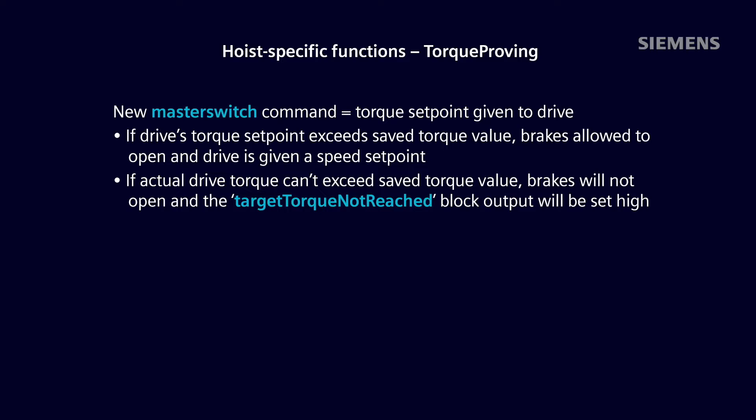If the actual torque generated by the drive is not capable of exceeding the saved torque value, the brakes will not open and the target torque not reached block output will be set high. Taking a look at the TorqueProving block diagram, you can see the main block inputs and outputs. The enable TorqueProving input on the TorqueProving block is directly interconnected to the main drive block. So you will use the main drive block EN TorqueProving input to enable and disable the TorqueProving function.

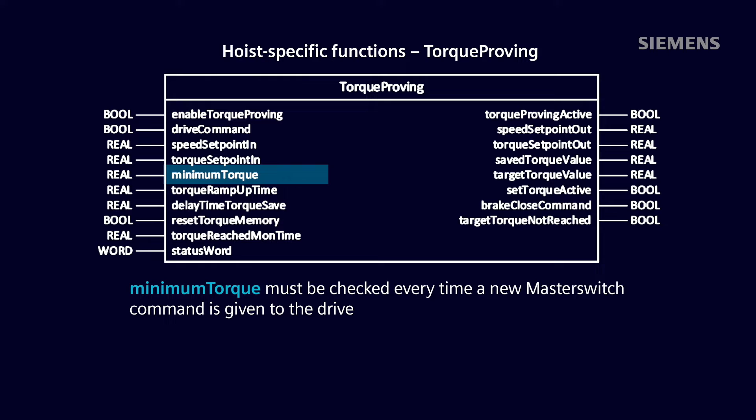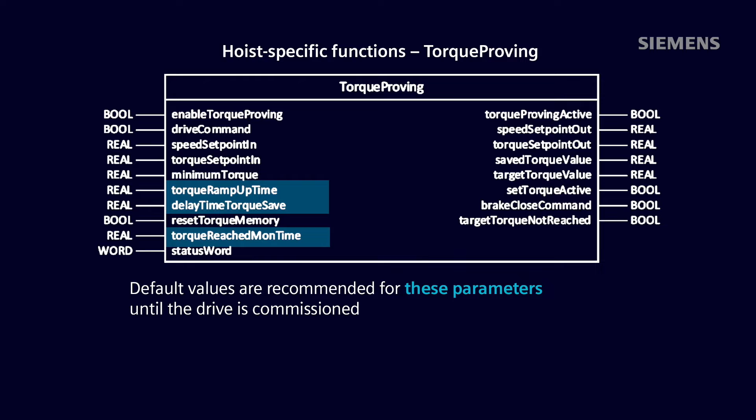You can set a minimum torque value that defines a minimum torque that must be checked every time a new master switch command is given to the drive. You can also set up the torque ramp up time, torque reached mon time, and the delay time torque save inputs. However, default values are recommended for these parameters until the drive is commissioned. Please note that when TorqueProving is used, StartPulse from the LCRBT DCC library can't be used because both blocks are using the same speed controller interface of the drive.

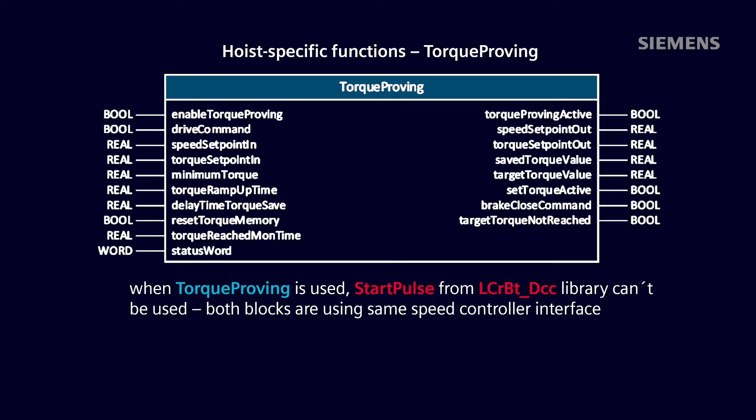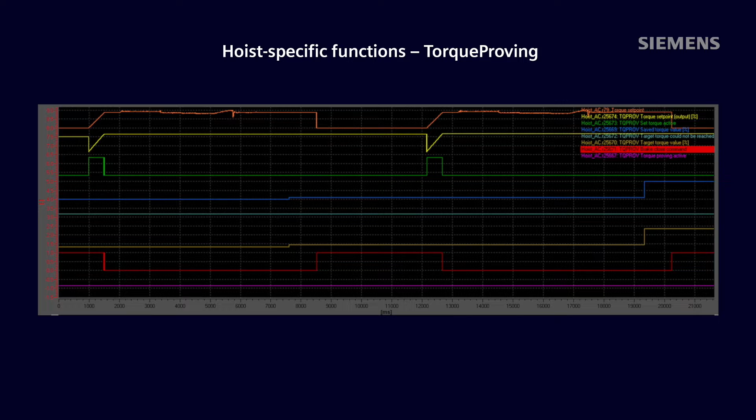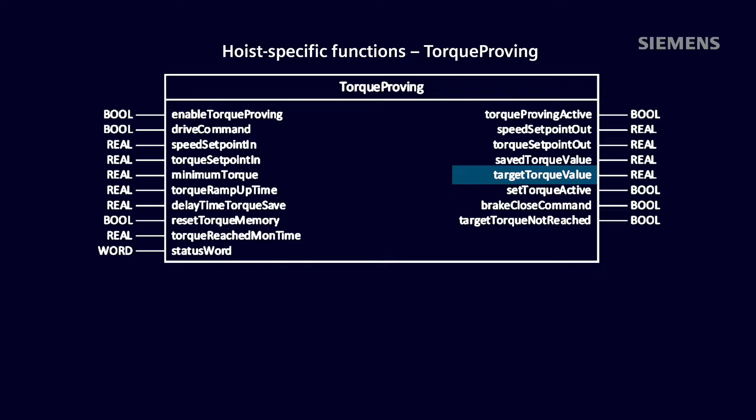This trace displays a successful master switch command where the TorqueProving block has been properly set up. It shows two separate operator commands being given to a drive with TorqueProving activated. In both movement commands, the drive responds to the operator input by ramping the drive torque set point up to the target torque value, which also happens to be the saved torque value for both of the movements.

Once the drive is able to reach the target torque value, the brake close command output is set to 0, allowing the hoist to move only after the target torque value has been proven. Once the operator command is complete, the brake close command is set back to 1, the brake is closed, and the torque set point of the drive returns to 0 until a new operator command is given and this process is repeated.

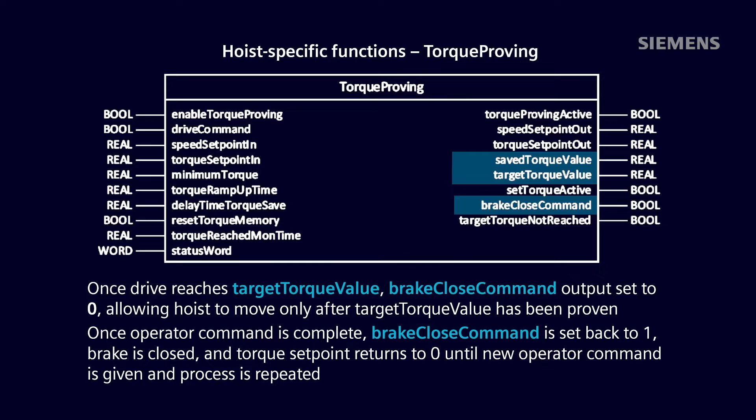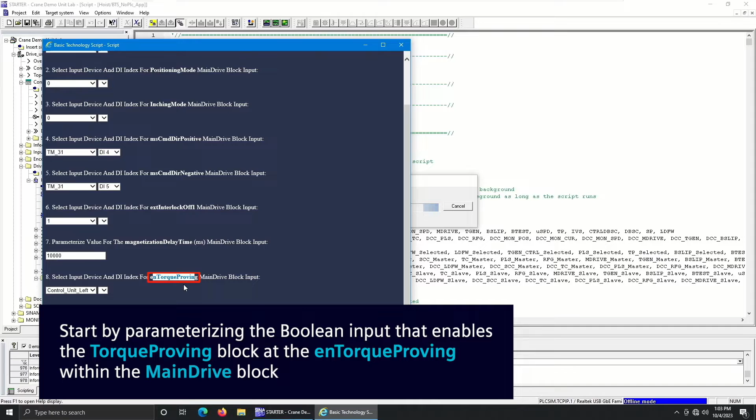During script setup of this block, you will start by parameterizing the Boolean input that enables the TorqueProving block at enTorqueProving within the main drive block. You can use a PZD bit, DI feedback, or simply enable the TorqueProving function by selecting 1 from the drop-down menu.

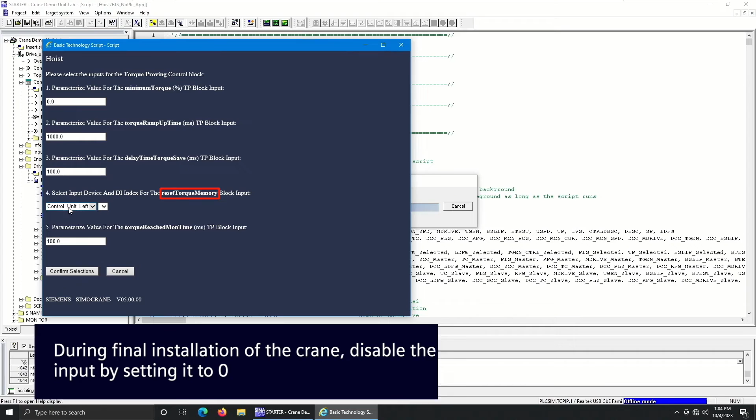On the TorqueProving block setup page within the script, you can parameterize the minimum torque, torque ramp up time, delay time torque save, and torque reached mon time parameters. You'll also be asked to set up a Boolean input for the reset torque memory block input. During final installation of the crane, it is suggested to disable this input by setting it to 0 in the script setup as done here.

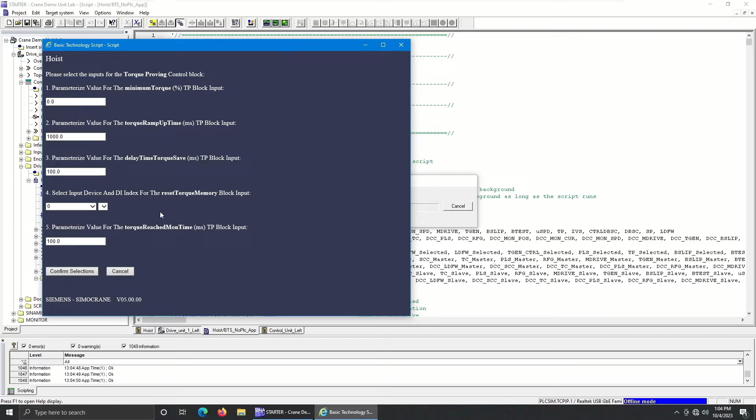However, this bit may be used during initial commissioning if the TorqueProving block fault occurs. This input will reset the last saved torque to be proven value of the TorqueProving block when it is set high.

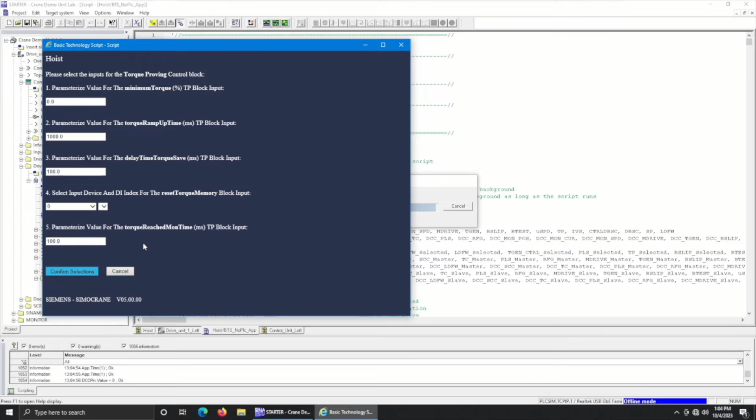As demonstrated in a previous video, you will always be prompted to set up the actual position velocity and ramp function generator blocks. If the actual position velocity block will not be used, you can make these selections for the Enable Act Pos Vel and Start Homing block inputs. The setup for this block, when it is being utilized, will be covered in a future video. So for now, we will keep it disabled by making this selection.

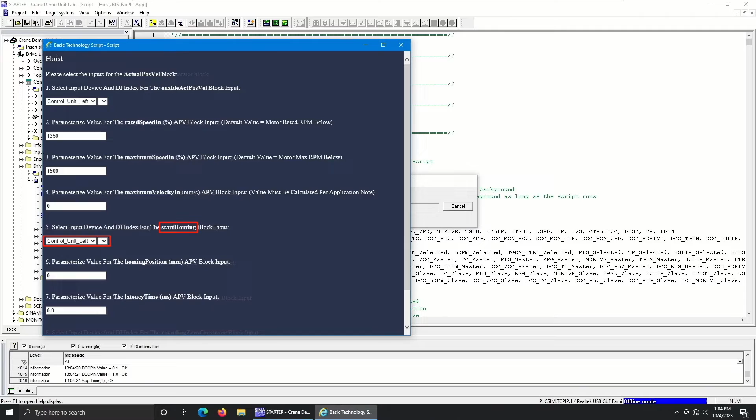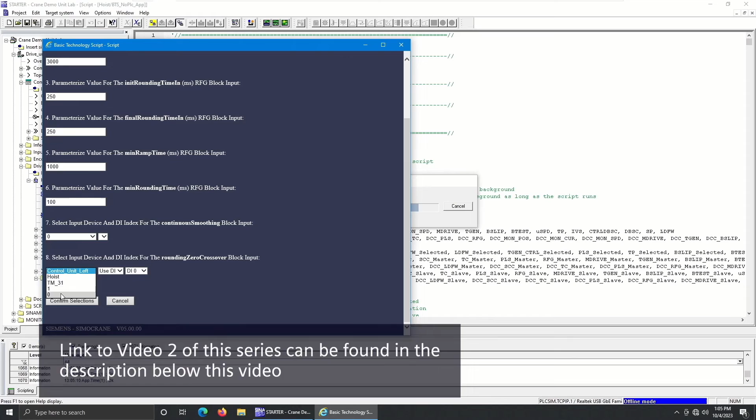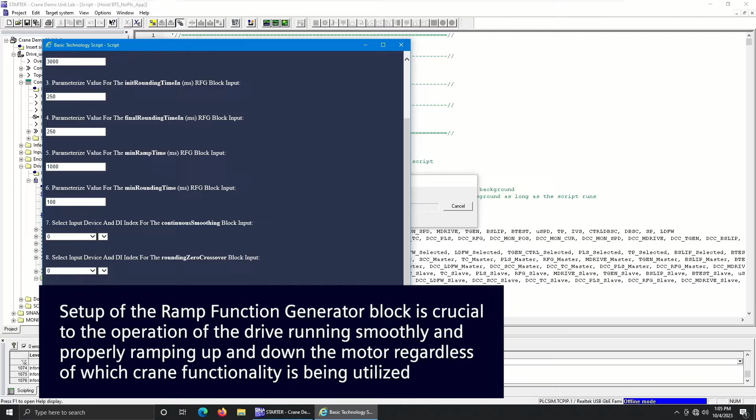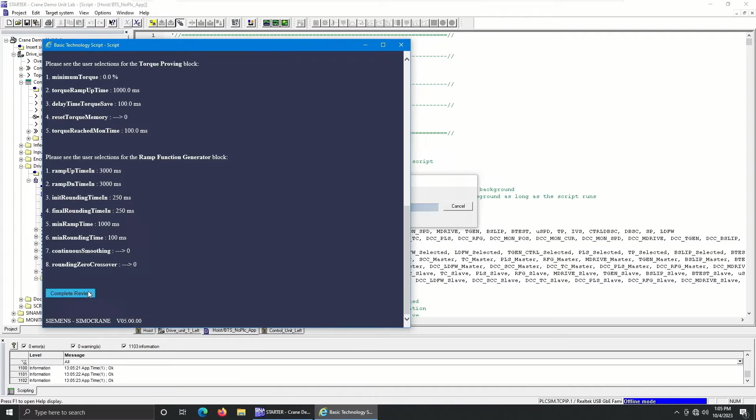Finally, you are prompted to set up the ramp function generator block. Setup of this block is covered in video 2 of this series, so it will not be covered here. However, it is recommended that this block is set up correctly, as it is crucial to the drive running smoothly and properly ramping up and down the motor, regardless of which crane functionality is being utilized. Once the script setup has been successfully completed, you're shown a summary screen of your choices, and the TorqueProving function can now be used while controlling the drive.

Like the TorqueProving block, the StartPulse block works to prevent load sag on a hoist. However, its mode of operation is different. When a drive is switched off, the brake applies the necessary holding torque for a load. When the drive is switched on and the brake is opened, the drive must apply the necessary holding torque. Since the necessary holding torque is not known to the drive when it is switched on for the first time, the load cannot be held and sags as a result.

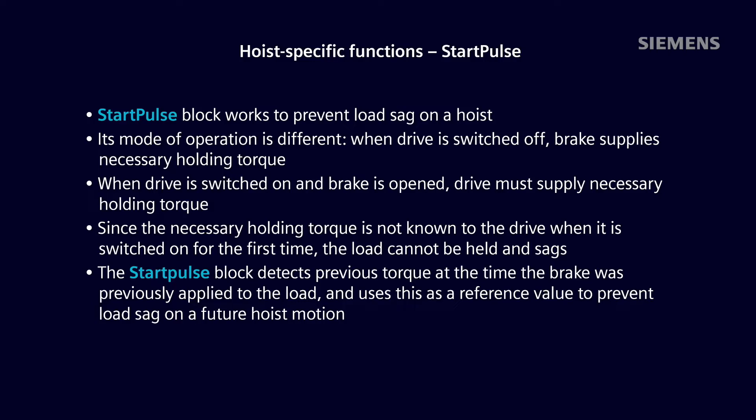The StartPulse block detects the previous torque at the time the brake was previously applied to the load and uses this as a reference value to prevent load sag on a future hoist motion. To use the StartPulse block on a hoist in lieu of the TorqueProving block, the DCC must be opened by double-clicking on the DCC in the project tree.

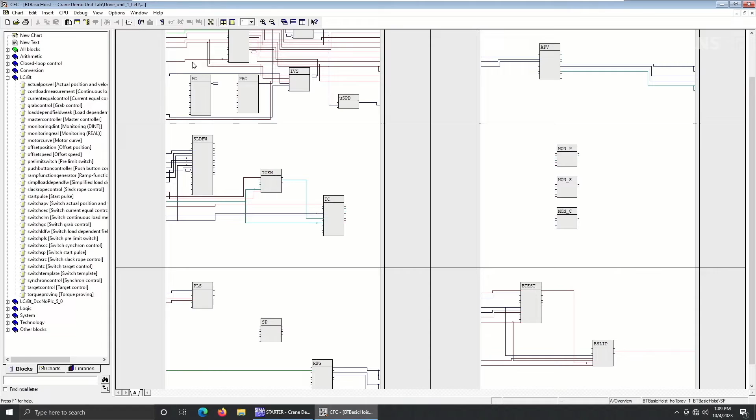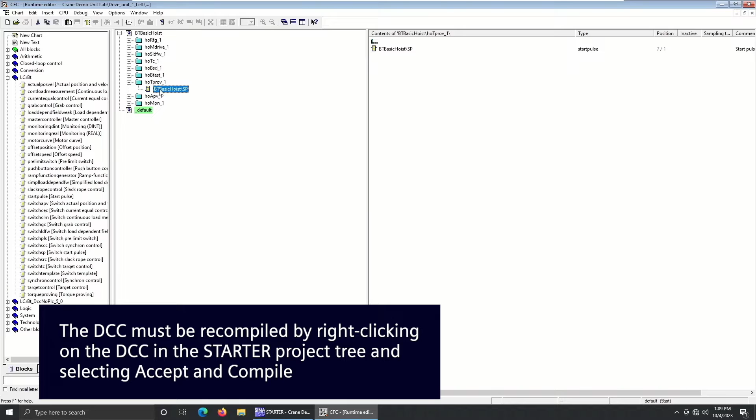Within the DCC, drag and drop the StartPulse block from the LCrBt library and rename this block SP as shown. Once this is complete, the DCC must be recompiled by right-clicking on the DCC in the STARTER project tree and selecting Accept and Compile. The script setup can now be completed for the StartPulse block.

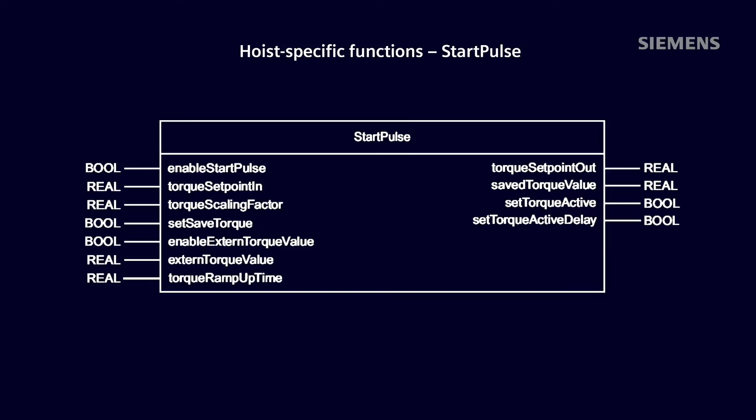The StartPulse block includes the following parameterizable inputs. During script setup of this block, you should configure the torque scaling factor, enable extern torque value, and torque ramp-up time inputs. Generally, it is suggested to use default values for these parameters during initial crane commissioning and then return to tweak these parameters later to optimize StartPulse functionality.

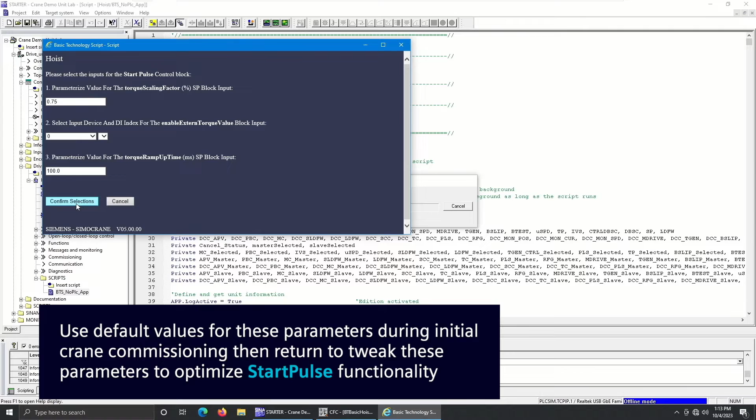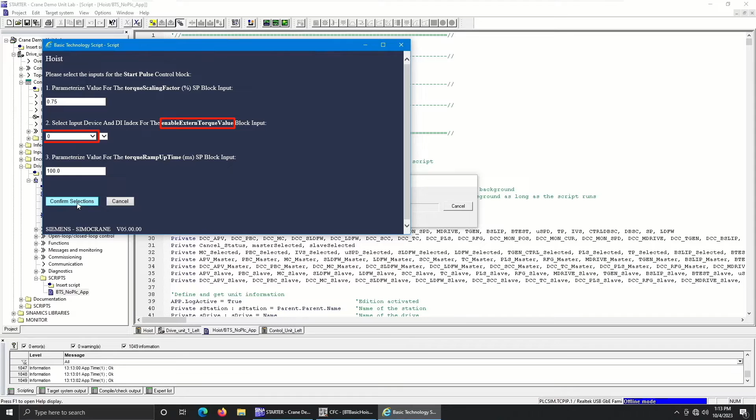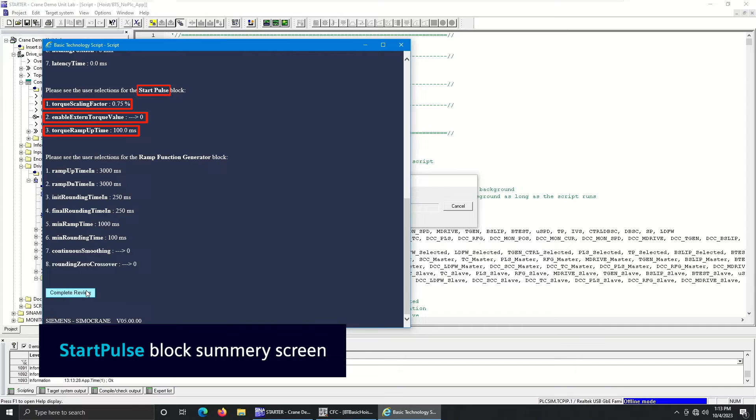Unless you'll be setting up an external torque value source, the Enable Extern Torque Value input can be set to 0. Once these parameters are set up within the script, complete the rest of the script as previously described and test the StartPulse block.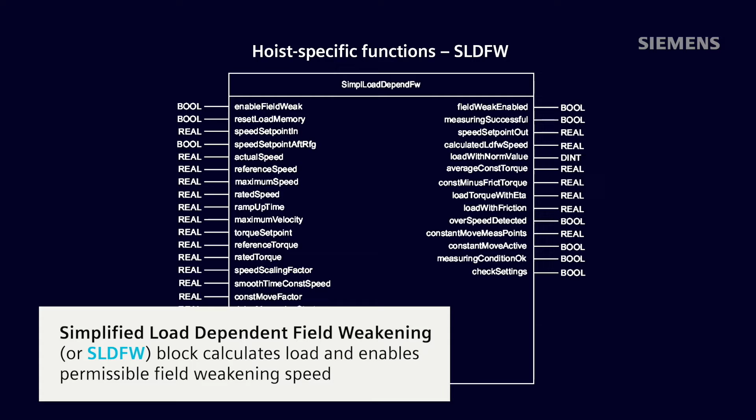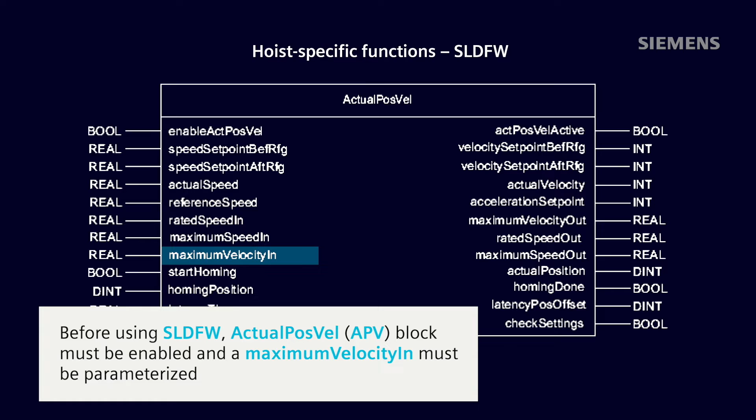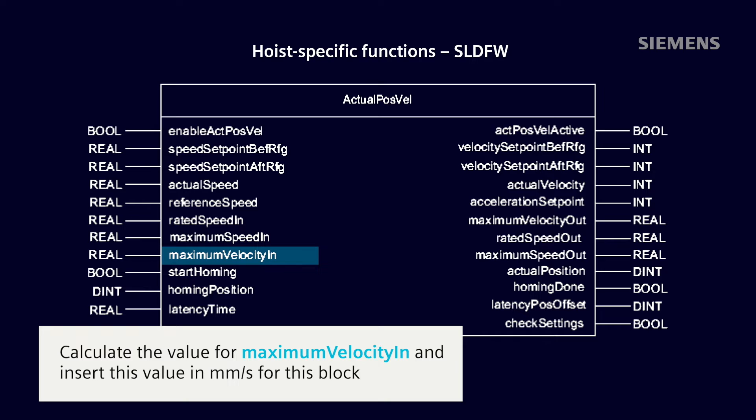The Simplified Load Dependent Field Weakening, or SLDFW block, calculates the load and enables the permissible field weakening speed. The load is calculated during constant travel and not during acceleration. Here are the parameterizable inputs for the SLDFW block. Prior to using SLDFW, the actual position velocity, or APV block, must be enabled and a maximum velocity in must be parameterized as follows. Calculate the value for maximum velocity in and insert this value in millimeters per second for the APV block input.

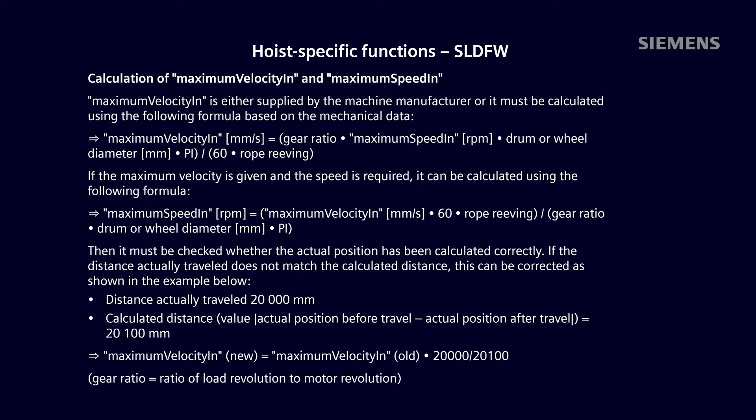The application note available from the SIMOCRANE Basic Technology V5.0 operating instructions describes how to accurately calculate this value. For convenience, the formula for calculating this value is shown here. You might have to adjust this value after initial commissioning to get the most precise drive operation possible. However, the initially calculated value should be very close to the actual maximum velocity of the drive in millimeters per second. The rest of the APV block will be covered in a future section. However, it is required to correctly parameterize these values of the APV block when running SLDFW.

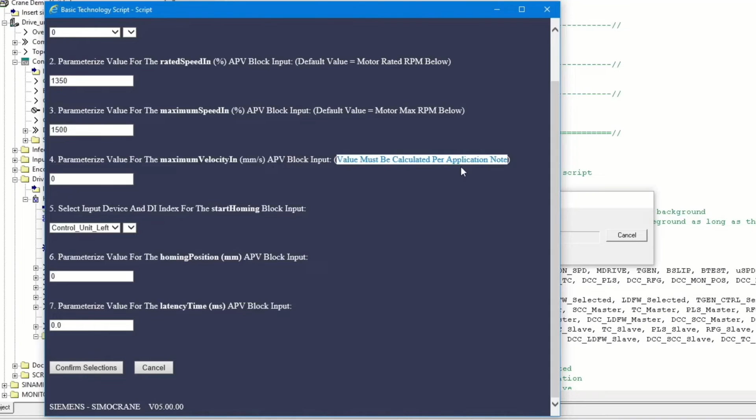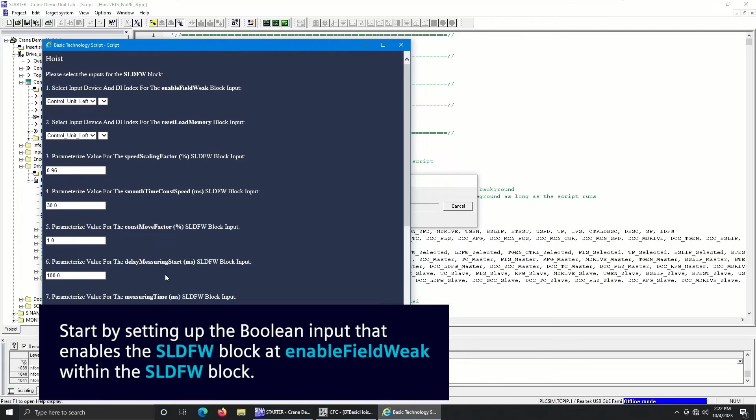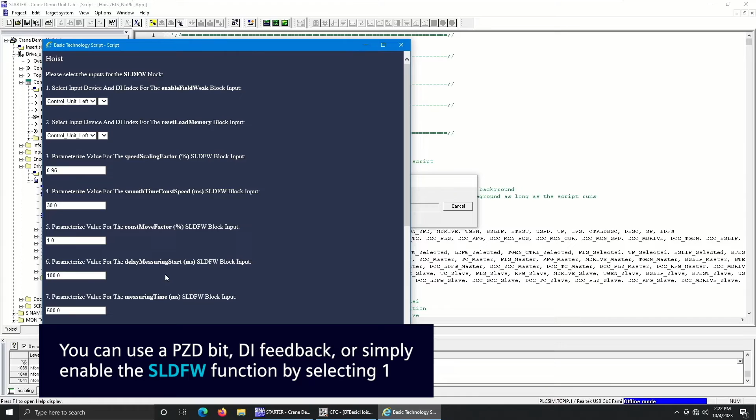During script setup of the SLDFW block, you should start by setting up the Boolean input that enables the SLDFW block at enable field weak within the SLDFW block. You can use a PZD bit, DI feedback, or simply enable the SLDFW function by selecting one from the drop-down menu. You must also set up the reset load memory block input.

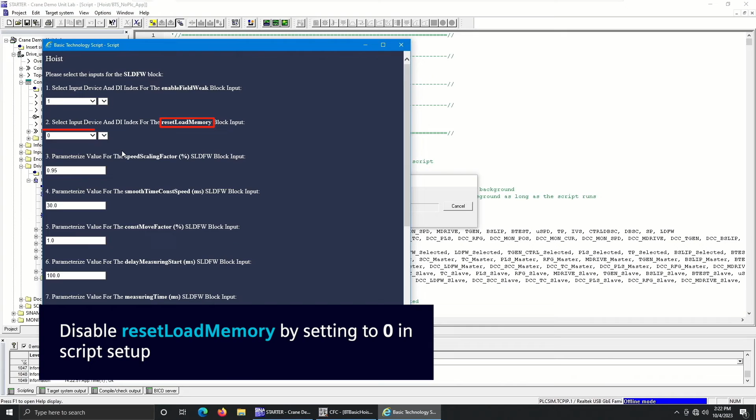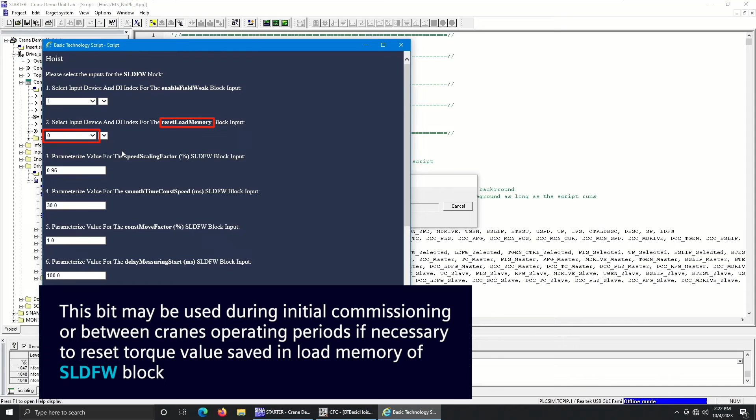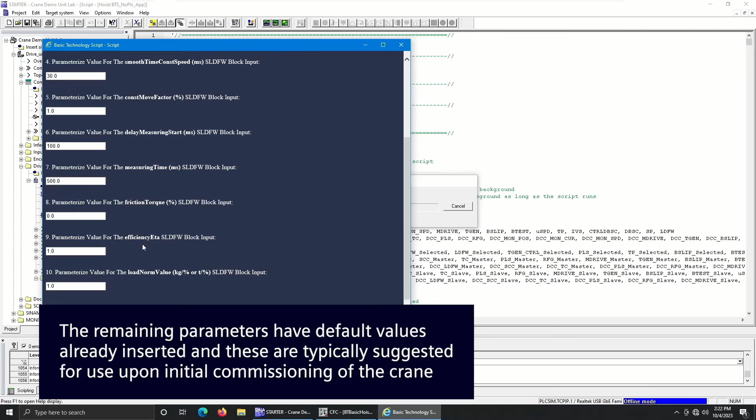During final installation of the crane, it is suggested to disable this input by setting it to 0 in the script setup. However, this bit may be used during initial commissioning or between crane operating periods if it is necessary to reset the torque value saved in the load memory of the SLDFW block. The remaining parameters of the SLDFW block have default values already inserted, and these are typically suggested for use upon initial commissioning of the crane. However, you can modify these inputs as desired during script setup.

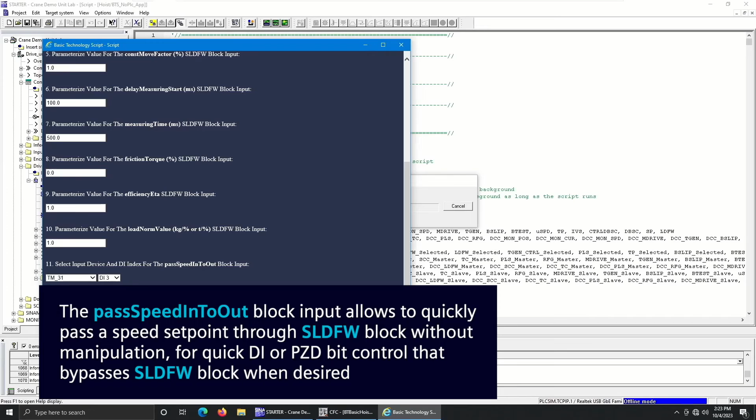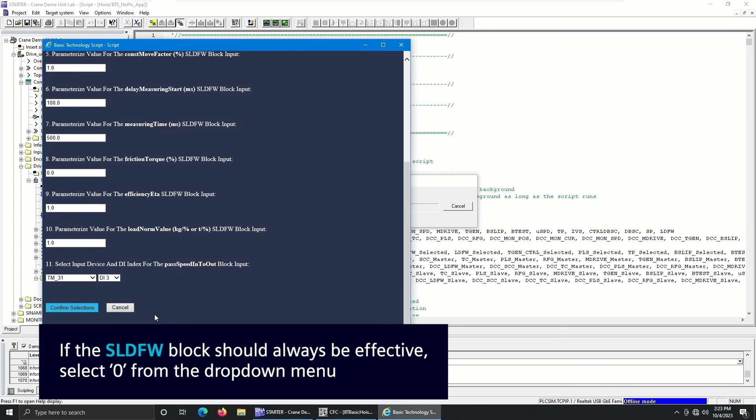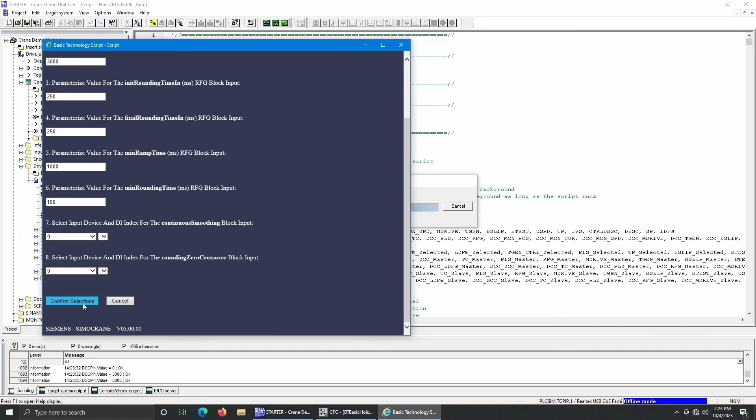The final input you should take care to set up is the pass speed in to out block input. This input allows you to quickly pass a speed set point through the SLDFW block without manipulation, effectively allowing for quick digital input or PZD bit control that bypasses the SLDFW block when desired. If the SLDFW block should always be effective, select 0 from the drop-down menu. Once these parameters are set up within the script, you can complete the rest of the script as previously described and test the SLDFW block.

Now you're ready to utilize the hoist-specific crane function blocks included in SIMOCRANE BT V5.0.